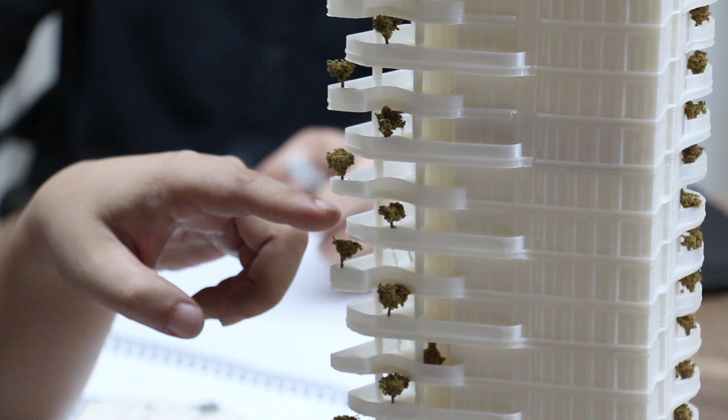WTA Live is this platform where we want to share with everyone what we do behind the scenes in our studio, how we try to develop ideas and try to change the way the city is. Today we're talking about some very interesting projects that we feel have been able to change the neighborhood where we live in.

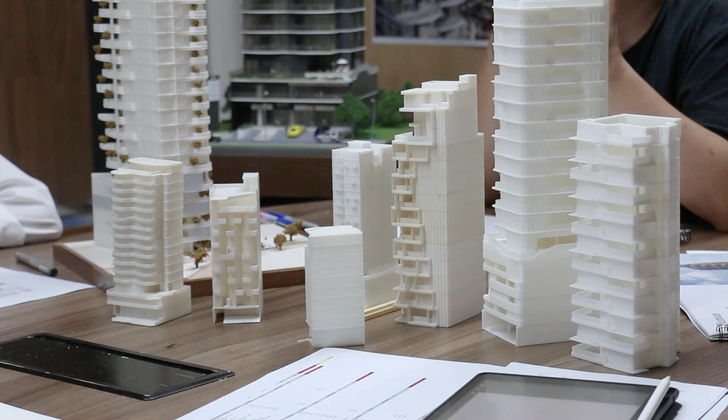The problem with all these townhouse developments is that they tend to be fenced off from the streetscape. And so what you get is a ground plane that's too quiet and sometimes also a bit dangerous because there's not much going on, nobody sees what's happening. In many ways, it's almost like another version of what happened in New Manila.

So we thought to ourselves, how do we expound or change the way the urbanism of San Juan is growing? How can we make this better in a certain way? And how can we rethink how people live? How can we give a better alternative that is also more desirable for the people living in San Juan? How can we come up with a better version, if you may, of what a townhouse is?

Looking at the overall picture, at the macro data, you're seeing how San Juan itself is a very desirable neighborhood, a very desirable city, being the geographical center of Metro Manila. And you start to think, if people here are living in these townhouses, what other typology can we offer? How do we densify? If more and more people want to come and live in San Juan and move in, what happens? What's the next step?

So we started to figure out how we can actually increase density by creating these medium-rise structures. With this typology, which we've been exploring with various iterations, we've been working on various sites. I think we're now on our fifth or sixth site. We've come up with different versions of how this works.

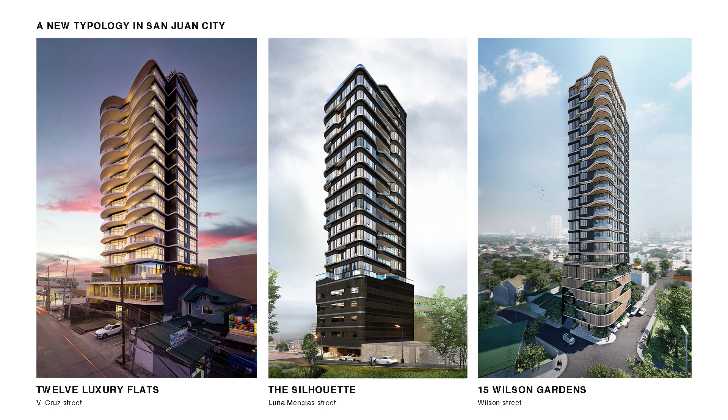And we said maybe a way of making this better is if we can have 300 square meter floor plates and have them one on top of the other. So now what you get is an entire residence on each floor without any neighbors and with better security. Basically you can have it even closer to the commercial areas where you have organic street life happening, where you have a lot of shops. So that's a way for us to densify San Juan and densify the neighborhood.

But I think more importantly, we've also been able to show that with these different versions you can come up with very interesting architecture at this scale. The idea that the Philippines or Metro Manila doesn't have to be just 40-story high-rise towers and then single 2-story villas, but rather you can have a middle ground. You can have a gentler form of density, a milder density that will allow you to say that these units are actually much more desirable than what is typically found in the area.

They offer better security, being in a tower. They offer better privacy because you have no neighbors listening to what you say.

And then you have a better view, a much better view. And of course, you have ventilation, you have the air around you on four sides, basically. So what you get is much more natural light, much better ventilation. And with those basic principles, you already have a much better home, right?

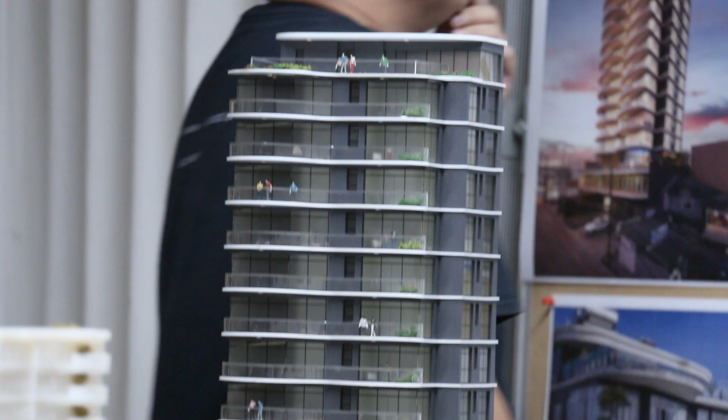So this was the first one really, and this project has 2 commercial floors, 1 amenity, and then 12 units with 1 unit on each floor. This project was started about 6 years ago, and now it's finished. So we have these photos here of the finished building. And it's really one of the most striking buildings that you can find in the neighborhood.

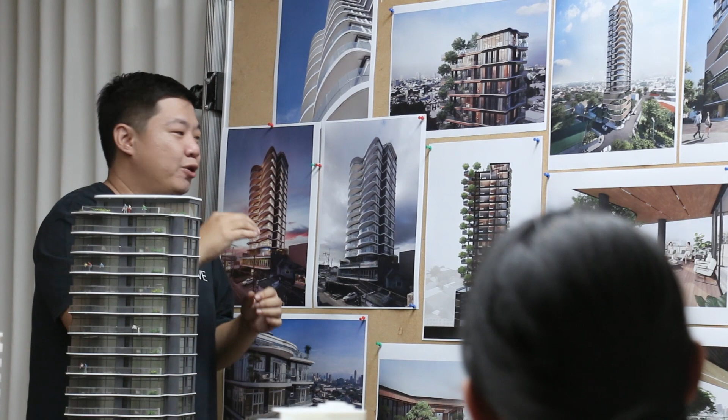And I think the idea is that we wanted to emphasize how you have 1 unit on each floor by emphasizing the slabs of the balcony. So you have these post-tension slabs that are thinly profiled. And so the distinction of how each floor comes out, from the street level even, you can really see the intent of what we wanted to do with the building.

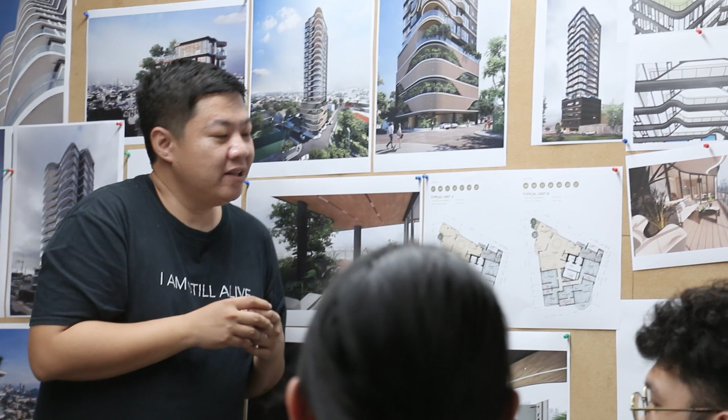The second iteration we did is this building called the Silhouette, and it's actually this building, right? And so the idea here was to come up with a more Manhattanist kind of urbanity and saying, okay, how can we use this 400 square meter plot and come up with something that's very sexy in many ways, right?

And the idea that each floor is actually changing, and so you have a diversity of form throughout the side of the building. So if you look at the sides, the floor plates are changing, it's evolving, it's playing around. And so in this sense, you're getting also the idea that each floor is distinct and that each floor is really a luxury in so many ways, right?

And then a few other projects we're doing of this typology: we actually did this study of a plot in Makati and another plot in San Juan as well. This one is another property, I think in Mariano Marcos or somewhere there. We had a version where you had actually 2 units on each floor. So there's actually 24 units here.

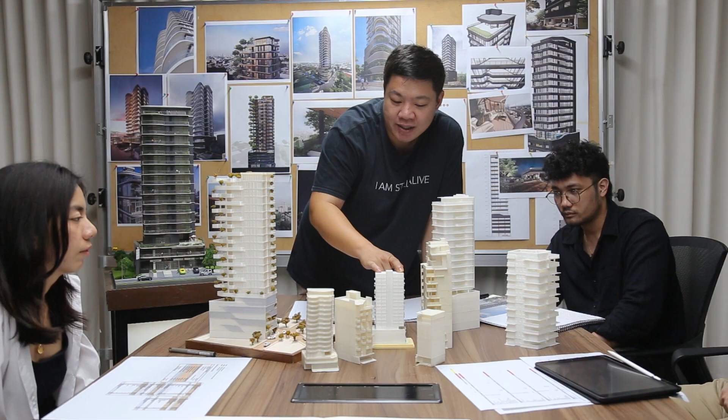We actually did 2 office buildings of the same type. This one's near Eastwood. This one's along Shaw Boulevard. And what you see there is that you have the same type of medium density, where you have a 15-story building. And so, it's a milder form of urbanity that we're trying to develop.

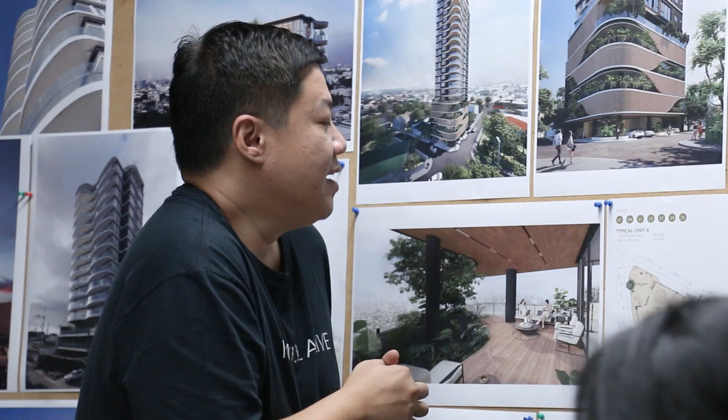Finally, we're now working on this project called 15 Wilson Gardens. And so with this project, we really wanted to improve on what we've been doing and say, how can we make this typology better? And so what we're now trying to say is that if we are living here in San Juan, one of the nicest things is that you see the greenery around you, you see the trees. But if we densify and urbanize more of San Juan, how can we retain more of these trees?

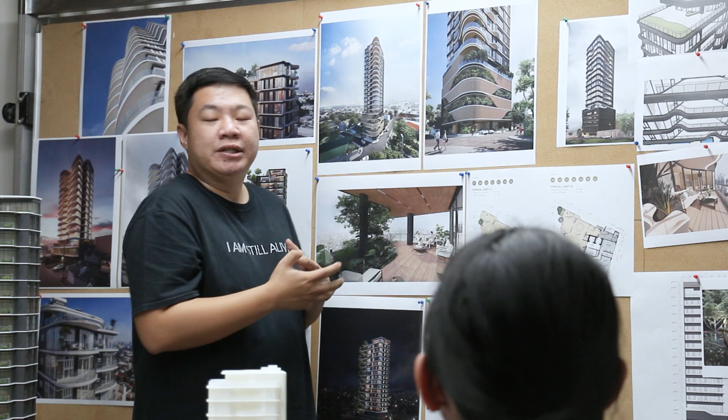And so what we're trying to do is we're trying to build almost like a vertical garden. And so when you see each floor, the floor plate is now a bit bigger. It's now about 360 square meters. And we've made the garden terraces much bigger and wider.

So when we were first starting doing 12, we had about, I think, a 3.5 meter deep balcony. And we said we wanted a balcony that was usable. It was not just a space where you go out, but rather now, what we're doing with 15 Wilson is that the terraces, you can actually plant in them.

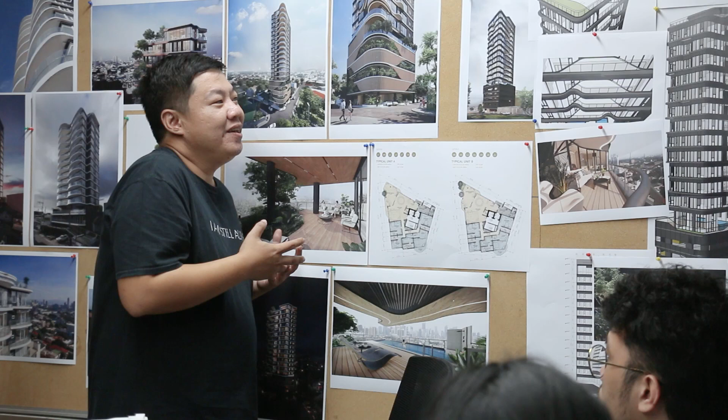So we didn't want it to be a balcony with potted plants, but rather we wanted it to be a real garden where you can plant trees, and then since the floors are kind of alternating, you actually see the canopy of each floor's tree on the next floor.

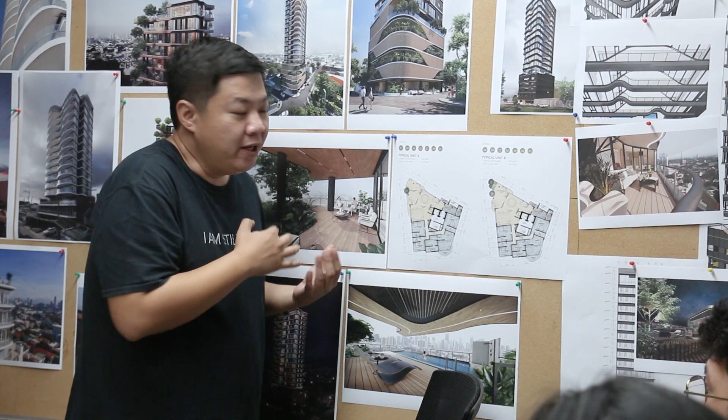And another iteration is that we were able to make the services or the elevators more private, wherein the service elevator opens directly only to the service area. And so the privacy of the living space itself can be preserved by closing it up whenever you're not there.

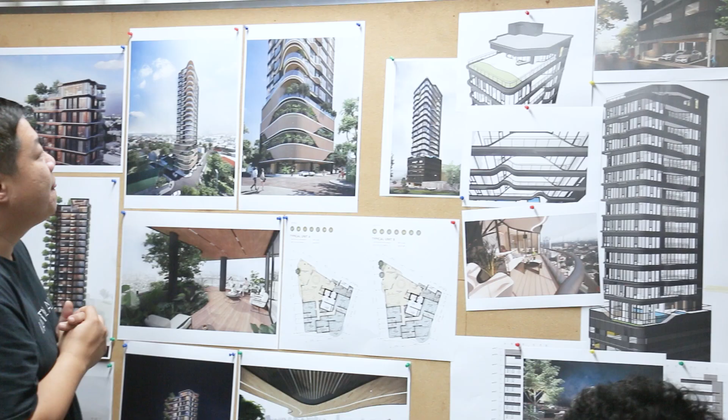And so what we're kind of trying to say here is that we can come up with this almost like highland greenery that San Juan used to be, San Juan, of course, being a hilly area geographically. And with 15 Wilson Gardens, we're saying that this 360 square meter space is just right.

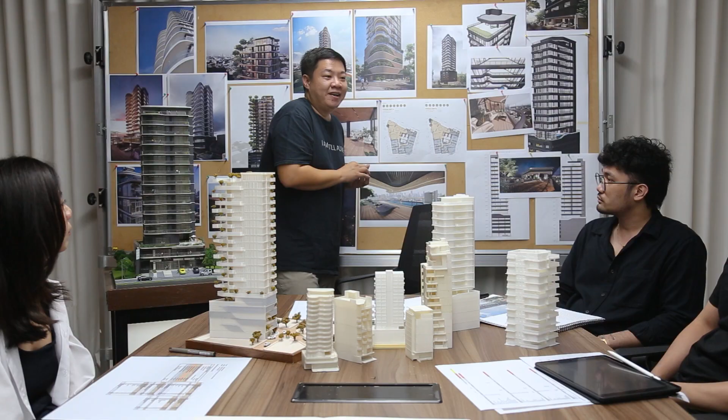Like it's just a bit bigger than what we had with 12. And now what we're looking at, of course, is that with all the spaces, you don't need something more. Whatever more space you would want is there already. So that being said, we're now going to be moving on and working on this next project that is about 670 square meters, and we're going to see what other changes we can have here.

We're back to work on these typologies, and the idea is that we're developing these medium rise typologies. The last project we worked on was a 500 square meter lot, and so for these projects, ideally you're looking at about 400 to 550 square meters. That would be the most efficient size property, but for this next project, we actually have a 670 square meter lot.

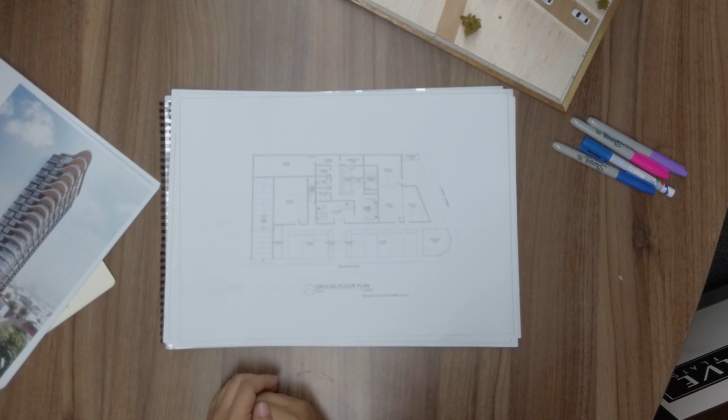And this makes it actually an interesting study, because with a much bigger property, we can maximize the space a bit more and could be a bit more efficient in terms of financial viability even. Because you get much more commercial space on the ground floor, much more engagement on the ground floor, and you're able to make the ground plane come alive quite a bit more.

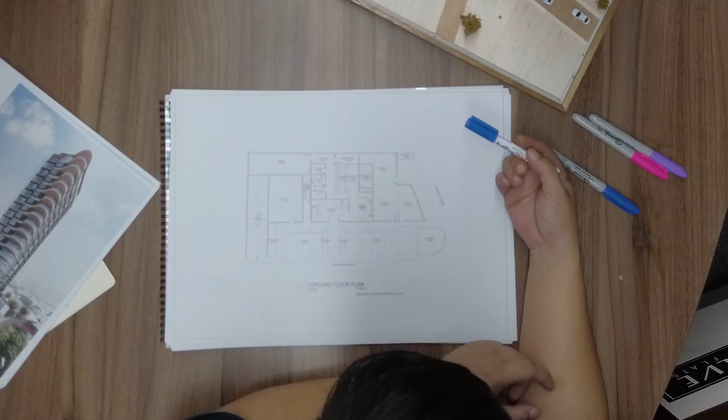And so this is what we have right now. We're looking at the ground floor space. The idea is that you have a small core for the building, and the rest basically is for retail, because you want it to be an activated space. You don't want the building to be just a dead or secluded building, right? And also, of course, you need the space for the ramp to go towards the parking, whether parking is going up or going down.

We've certainly realized that parking going up, or podium parking, allows us to build this much faster and much more efficiently. So recently, we've been able to do that. With this plan, the good thing is that you have the main street having such a wide frontage, right? And then you actually have just a very compact core here in the middle.

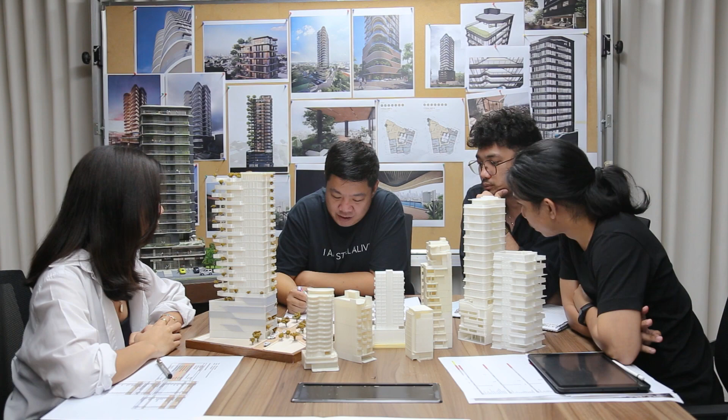So if this is your main street, I'm questioning what this space actually is. What happens here? Why don't we just make this a whole space or something even? Because you don't need much access there, right? Actually, this is a smaller retail space, and this corner is a much bigger retail space, because of course retail wants a corner unit. So you can ask them to take in a much bigger space.

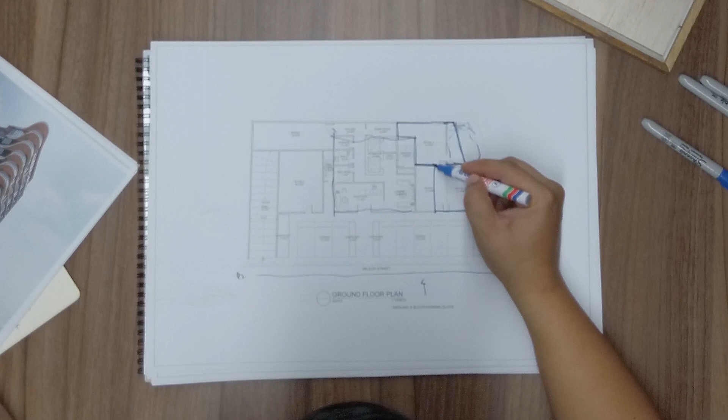Because this is about 100 square meters. And then you can have a small space here for like a water shop or something, right? And then this space here, I would want the retail to continue to take in this whole back, and take in this one. Or this can be a utility area, doesn't matter. But you want the full retail space here, and even this one, right?

So that being said, then they all have parking. I would want this to be parking as well, if I can, because I already have this main landscape here, right? You kind of have this nice front.

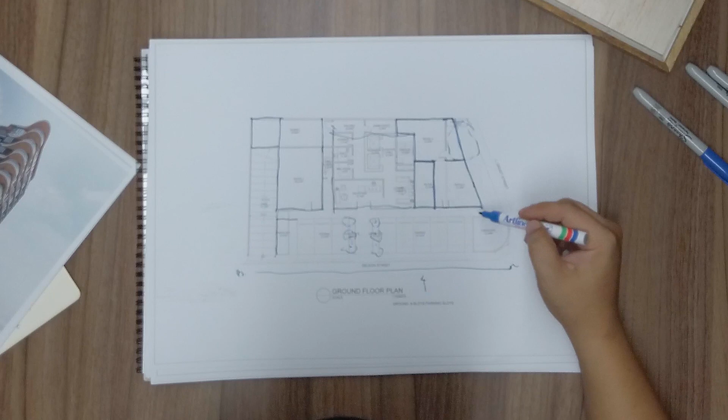And you also have this area. So I don't know if we can actually have indoor parking here. So this entire thing is landscape already, right? I mean, they can have al fresco there or something eventually. That's kind of not an issue. Then this one can be landscape. So that's already 2 strips there. That's fine. I think you're gonna have a small bamboo strip here or something. That's fine. But then you want this to be basically another parking slot.

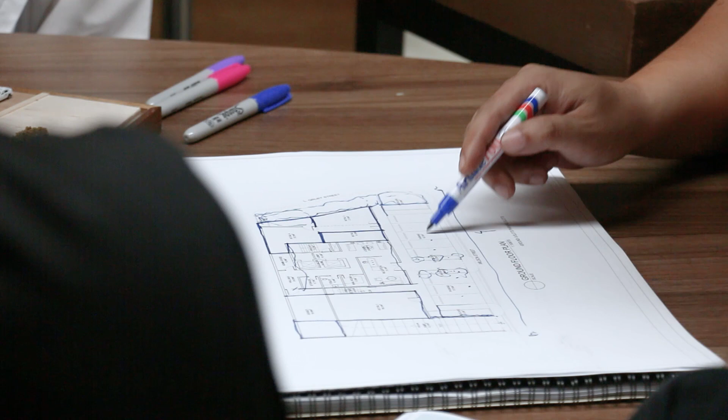So in effect, you have 1, 2, 3, 4, 5, 6, 7, 8, 9, 10 slots, right? So these 10 slots serve 2 stores. So maybe you have like 4 each, and then 2 can be for visitors. So maybe these 2 can be reserved for the visitors. And then all these is parking for the retail.

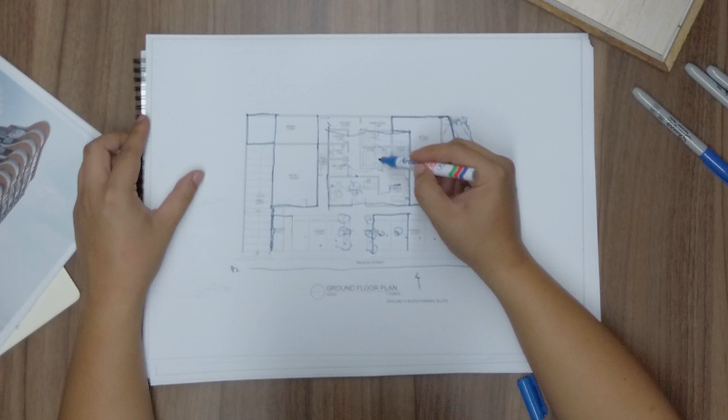So when you go in, you have a reception. You have a waiting area. You have a lounge. Main room. Maybe this one has to have a door or something, so that these guys can access the main room. Right, go to the lobby. Go here. Toilet.

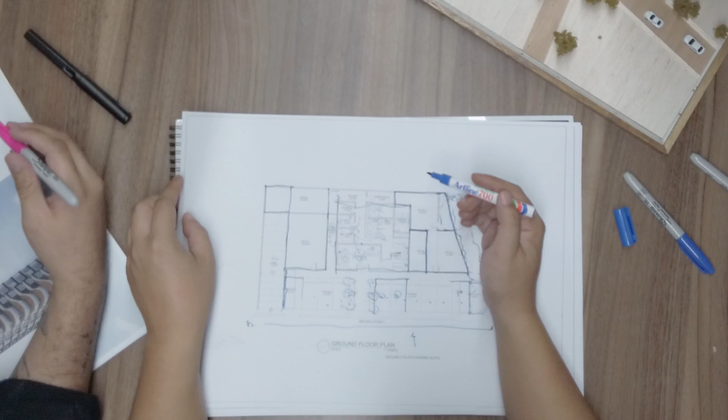So after that short musical interlude, we're still talking about this new project. We don't have a name for it yet, but the idea is that now we have a 670 square meter lot, and how do we maximize this? Definitely we get better parking ratios, and simply the cut of this lot is pretty nice actually. So we're here with the small core. It's very compact, so it's nice. It works well. In all essence, you get about 200 square meters of retail, which is very good already. That pays for the difference in the lot size already.

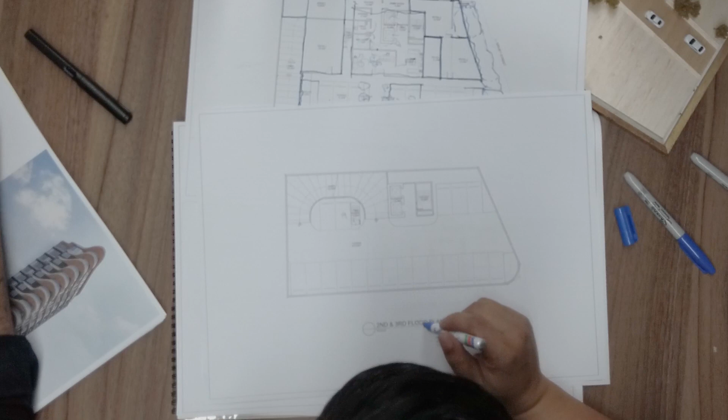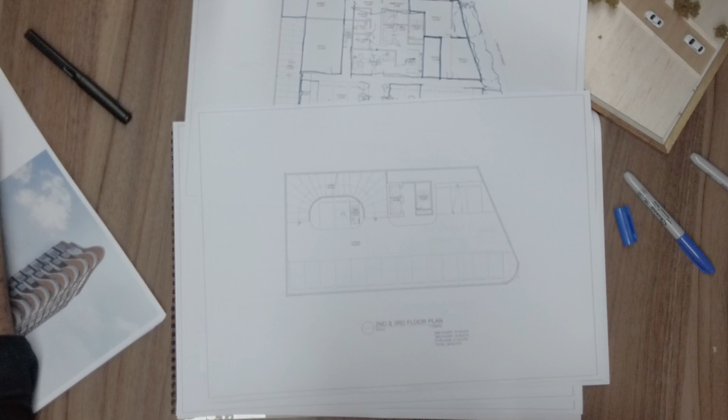So when you look up, your parking floor. So we have a parking floor here. Okay, so I wanted a second floor commercial. So that's the one missing. I want the second floor to be commercial, and then parking to be 3rd, 4th, 5th. Okay. So that being said, if this were commercial, this would just go up, right? And just end up exiting here. Down. And then you'll just flip it down on the upper floor or something like that. Or you don't want to make it go down here.

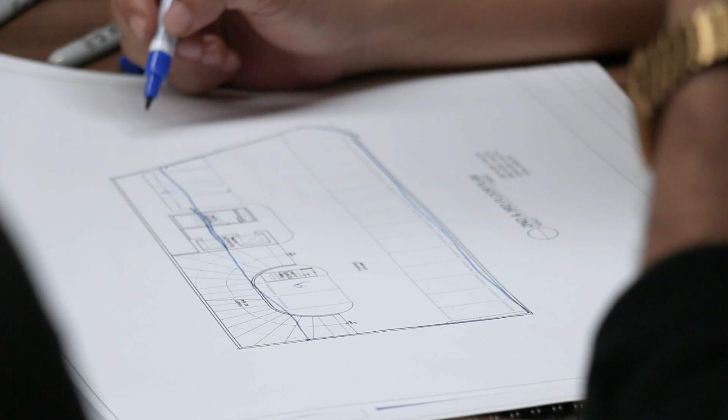Because you need it longer, ne? Yeah, you're gonna need it longer. The core has to move a bit down so you can have your parking here. Right, so probably exit here. So then I get an entire commercial space here of this size, which is pretty substantial. So I end up getting about 500 square meters of commercial space, which is pretty good. And so now when you get to the 3rd floor parking, you're actually coming out here.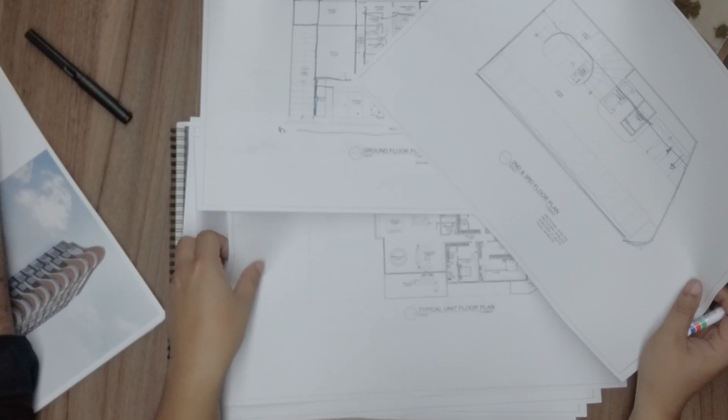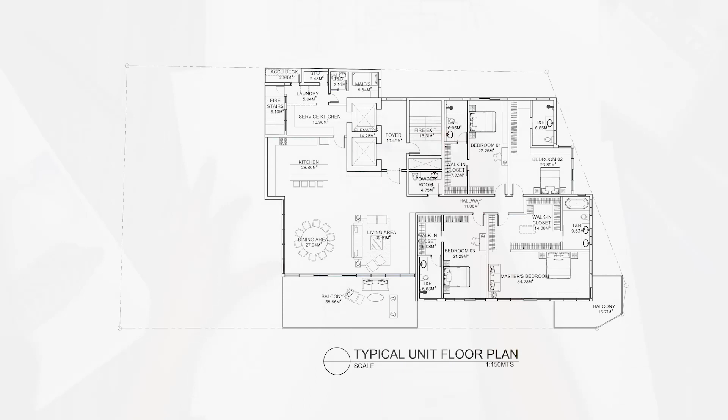And so you want what? Do we want to move the core? So that's what you have to see with the typical floor. Because actually the typical floor you can move anywhere naman. No, we want it to stay here. So can we move this core? Or do we just make the parking go here na lang? And then you waste all this space. So you need this space. So kailangan mo bumaba ito. Right? Which means you end up here. Actually, okay lang. So wala naman laman tayo. Doesn't hurt if you move it here.

Can add balconies. No. Your service core would move definitely to the left. Getting that space down. This chunk. Since that moved down, won't we move this left? Yeah. So your exit will be here. I don't know if that's visible. Or the elevator. Because you need your L-type elevator to be here. So you're gonna have a challenge with this elevator, how we lay it out.

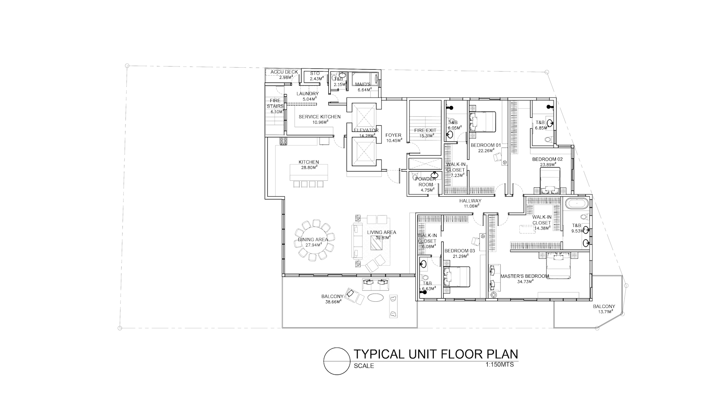One way is that you actually lay it out like this. And you still have a wall here if you want, and then this is actually your main door or something. That's okay. Because this is gonna be your main door. It's gonna be your living, whatever. Just switch it around. Right? Or this can be here also. Or the stairs are here, elevators are here, so your main door is here. So it opens to the living.

Pwede. So this is your service core. Just a bit bigger lang. And then this one, well, you get a smaller unit. Oh, and then you can move your toilet here. Why do you have a walk-in closet for the bedroom? Because the rooms are too big. So this becomes a junior suite. Junior.

Well, I would want my master's bedroom to be bigger if I had the option. Right, if I had the... Well, this is too small. The balcony? The balcony is small. I would probably want to eat up more of this. I would probably want the balcony to extend a bit more. I can just extend this, I think. I'll get about 50 square meters for the balcony.

And then the living area can go all the way here. I mean, so it's clean and all that. So that means you end up eating up to here. So this becomes part of the master's. Right. And then this is the other bedroom now. So what do you think? You kind of end up with this space here. And this is the other bedroom.

Right. And then this is the other bedroom. This one, definitely your toilet and whatever closet space. The bedroom can be smaller. The bedroom can be like this. This is the master suite. Well, this one can be bigger also. So I don't need this one. I can actually put it here.

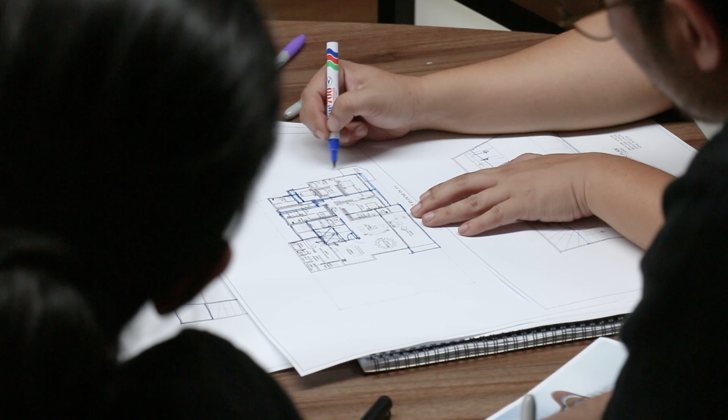Kasi this is the front. You basically don't really need this balcony anyway. I don't even think it should be arranged this way. Baka dito siya. This might be a better area for the balcony actually. Something like that. Kasi the L-shaped balcony is not very useful. I think that's a better form, right?

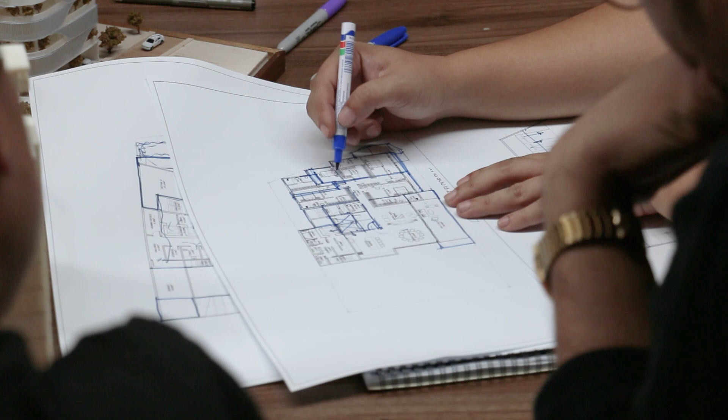And this can be your toilets and walk-ins, whatever. This can be a walk-in. And this is the bedroom. This is an anteroom, right? Like an anteroom, and the bedroom itself is here. It's kind of nice. Kitchen, living, fine. Yeah, living becomes bigger. You can have like a whatever.

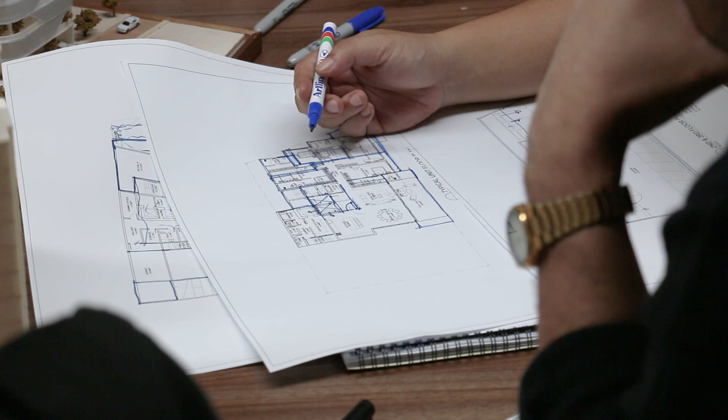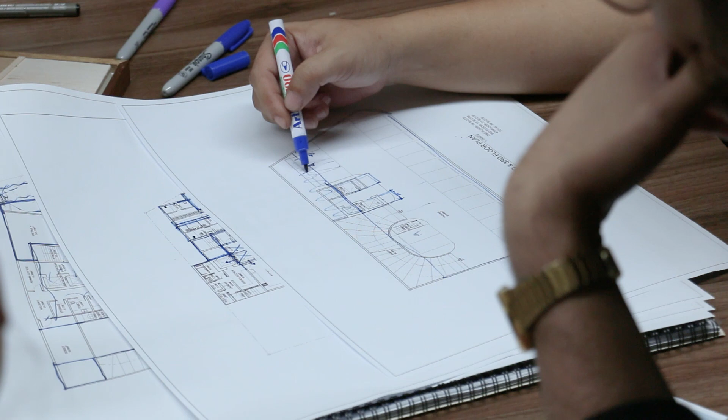Pwede, no? So kunin natin to for the bedroom. So we can do this, we can make this go down. Okay pa rin naman eh. This is pretty wide, it's okay. So you can have your ramp here. That's okay. Works for me. Question is, what do we do with this? You have such a big area here.

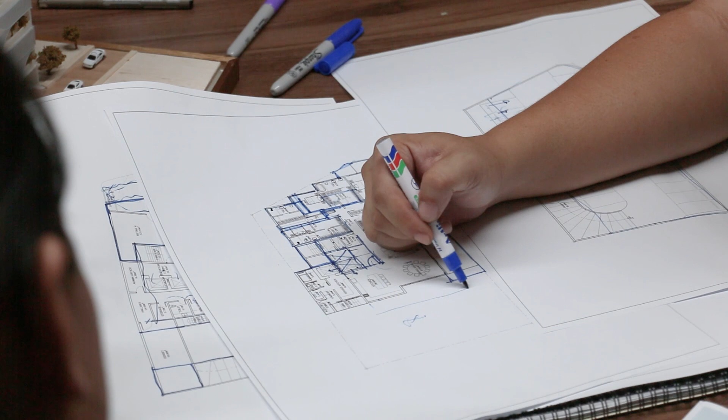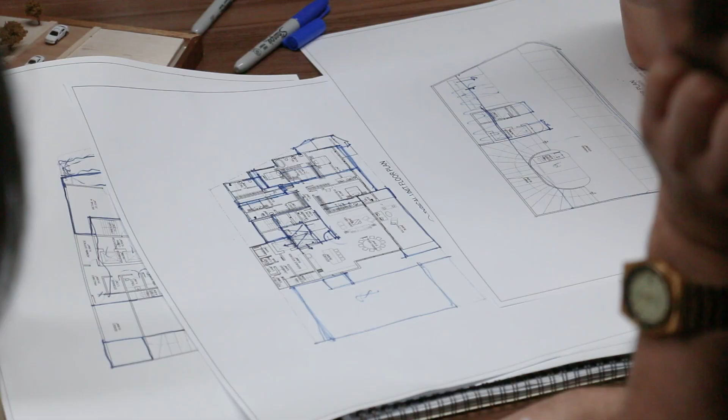If ever I want to build an attached building here, do I just set up here? Let's say, okay, this one can be far away if I want. Just go here. Or not? This can be the second phase. What will be the typology of this project? It can be a home office. So if you buy here, you can actually have your office here. That's kind of cool.

Diba? You already have a kitchen. Parang okay, I have my small clinic here, and then maybe you can even have a connection here or something. If you really want, you can connect this balcony also. But I think this connection element has to be optional. Maybe not here, so at least the balcony is always outside. Right, so this is kind of optional. If I buy this, I can connect. If I don't buy, then I don't.

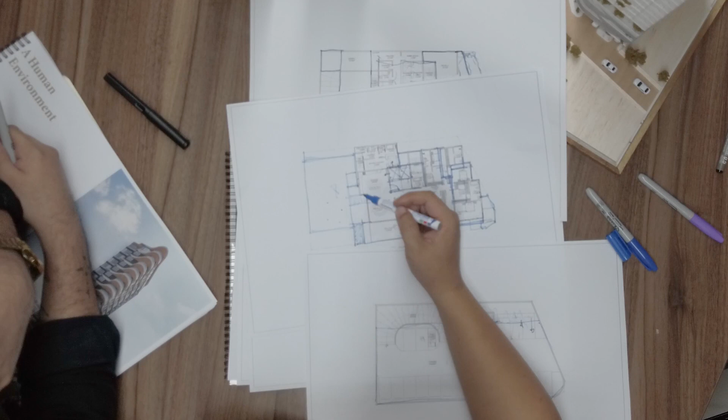Right. So then every floor can be owned by the same owner. And then if you say, okay, my house is too small, I'm gonna buy this to just make it my bodega or extend my house, right? So this makes sense to build eventually. I mean, it's possible, right? And then this is the view. This is still the main view, so your view is still this one. That's still okay. This is Wilson. That's still the main view.

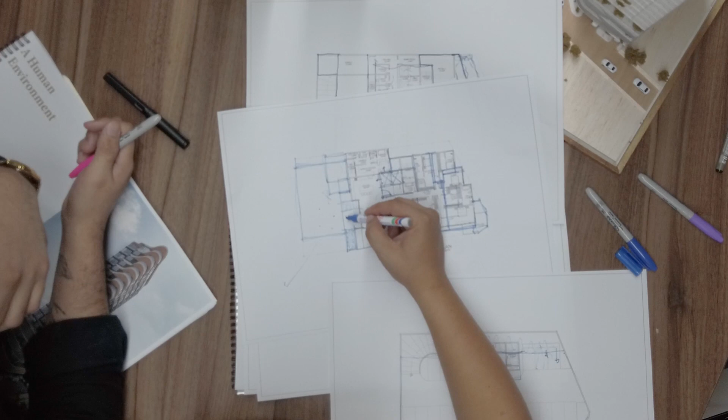Oh, this one is your core anyway, so this one you can actually enclose naman natin. Your core will probably be here, at most up to here. This is your core for this. So you still have a pretty nice solid building. You have windows on this side, windows here. You can do a firewall here if you want. If you don't want it, you can set it back a bit here, so you have a window here, firewall up there. We have a pretty nice space. This is a good 150 square meters. Small office. Clinic, something.

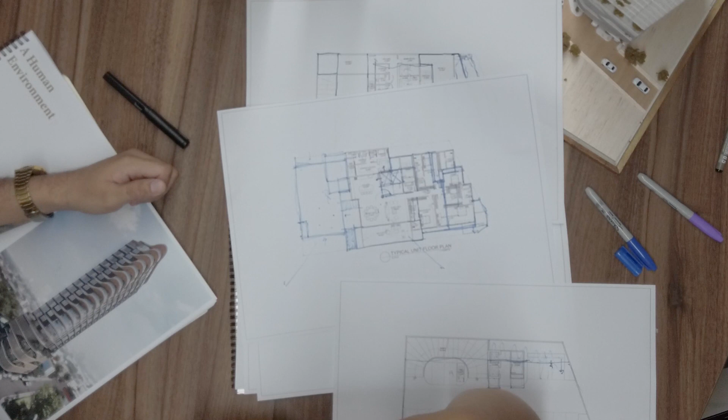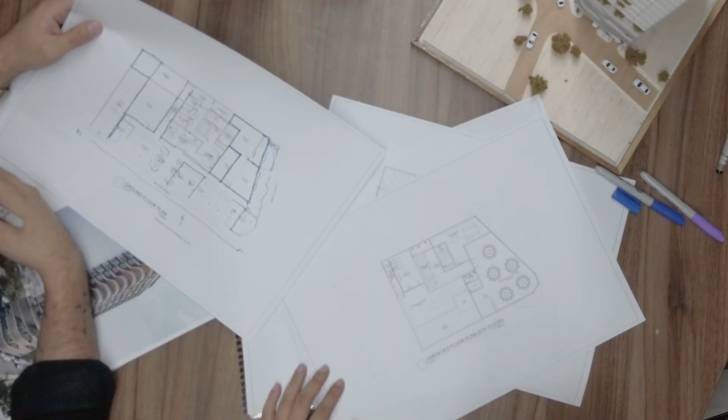And then, for the amenities, same. For the amenities, you basically will get the same thing. You can actually mix your amenities with some more leasable retail type of thing. Para more exclusive, like this can be like an exclusive club or something in this area. Right, that can be something like that.

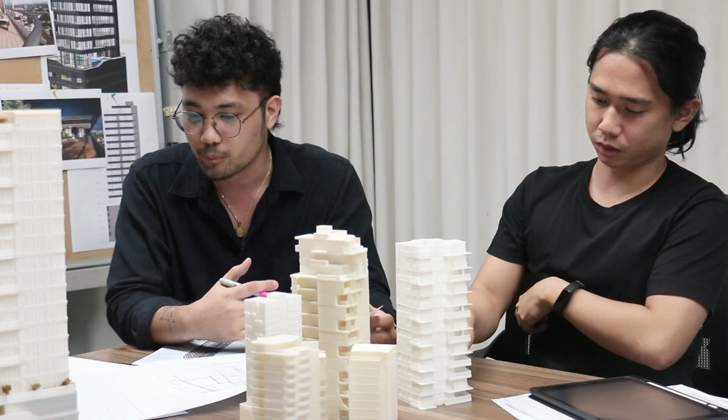Just to take some thoughts from what you've said earlier, since we've been talking a lot about social architecture even before, how can we engage the podium design in terms of the existing environment, since nowadays podiums were just designed as podiums? Like here, we're just designing it. Okay, this is the ground floor. We're providing parkings for it. But podiums nowadays are neglected. And if there is something that we can learn from the pandemic, it is that we don't have a lot of shared spaces like the amenities.

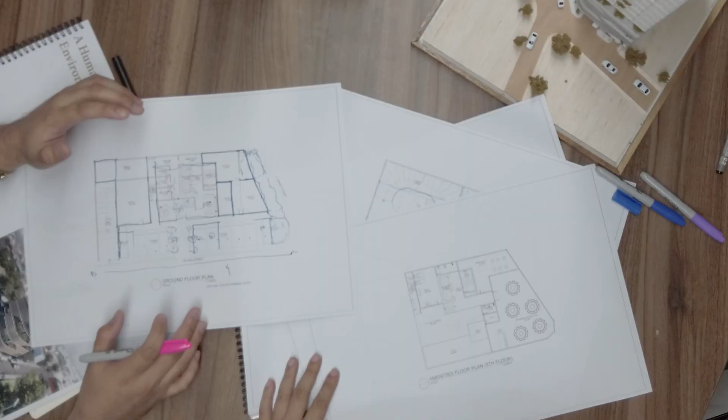When we're talking about the podium, maybe we can use it to engage more in terms of the people using the whole structure. Also, in this kind of environment, since it's a corner lot, maybe we can do something about this area here without sacrificing too much of the leasable spaces. Because if we're engaging it to the major streets, and since it's a corner lot, maybe we can do something about creating a vertical open part. It's just a visual aesthetic, but it gives something back to the community. It's not just for the users. It's inside out. It's a double-edged sword.

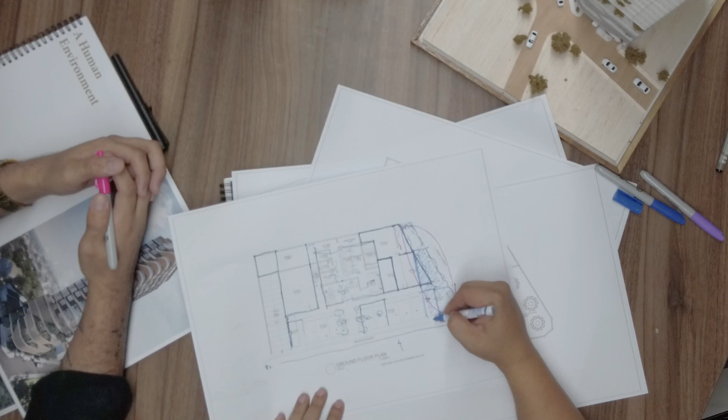Well, I think we can cut it here. We can give this space so you end up with this wide space here. Right? Because we don't really need this corner. It's a useless corner. So if we're able to cut it here maybe, then we can give this like a 4-meter wide space already, right? So you can give this parking slot if you want. And then we can make this corner park here, small park. I don't know, we can put a small library here. Right? Small reading area, if we want to, we can make this a playground, this back area.

But one of the things that we're really looking for is more engagement with the street level. Yes. But engagement with the street level also means that you need these spaces to be activated. Yeah. Right? The building's not gonna run that space because that's a private building. Those are residences. Residential. They're not gonna. So you need tenants to actually activate your ground plane. Without the tenants, it's dead, right? So that's why you need commercial space. So I think that's why you want there.

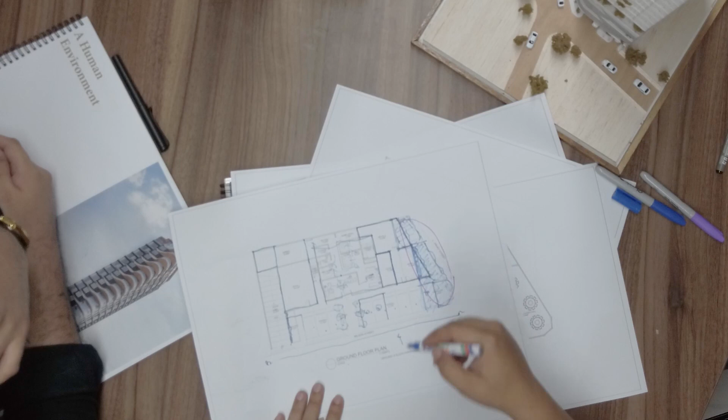But definitely you can make this interesting, like a wooden deck even or something. This area here. Yeah. I think the length allows us to do that now. The office space. And then because of this cut here that's diagonal anyway, we might as well just give it to them. Right there. In this area. Could work. It's wide enough actually. Yeah, this is like 150 square meters already. Could be.

But I think the question really is what to do with the parking, right? I mean, it's always parking on the podium level, so I think that's why we have to make parkings more open, more porous. It's like how we're doing it here. Parang if we can make parking spaces that are more open, then they become more adaptive. And hopefully if the day comes where we don't need parking anymore, then this can actually be another space. Like, that's what we said about this. If I don't need one floor, I can just turn that floor into an office space, right? So I don't mind building 4 floors of parking, because at the end of the day, that parking area is an open area.

Actually, one of my thoughts is like, what if we do an open gym? Open gym. Yeah. Some buildings could actually do that now. They moved their gym equipment outside. They moved it to the ground floor in front of the lobby, so it's open air. Mm-hmm. So rather than keeping it in the normal amenity floor, they moved it down.

Actually, it's more of not really an open gym. It is an open gym, but I was thinking more of like a vertical park. Mm-hmm. So the thing about park space is that we think about park space as somewhere you walk, you go around, lakad. But you can actually have recreational equipment. Diba?

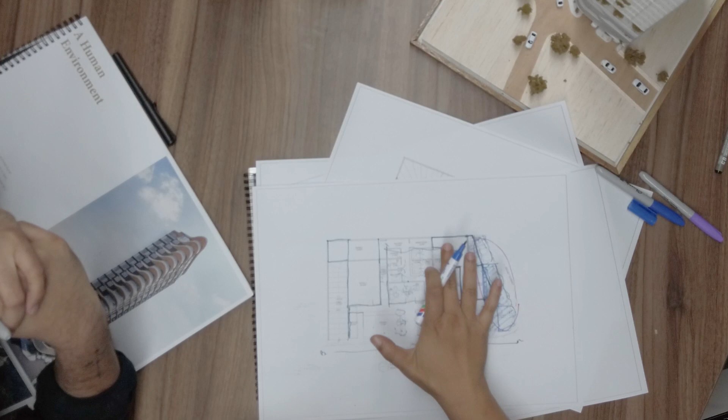Maybe you can provide that to the public, so it becomes a public park in a way, or it can be a club—a transition space. It can be like something where you have members in the area, and they have access to this park and pay a fee, which then maintains it and sustains it better.

I mean, it's exclusive but merged into the building, so then it's also an asset of the building because now you have a park in your building. At the end of the day, it's still a park. So that's something interesting—maybe that can be worked out.

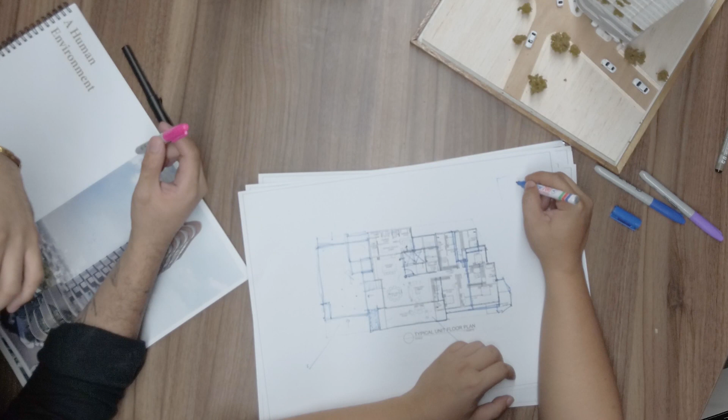Also, on the typical floors, is it possible to normalize having bigger balconies? Because nowadays balconies are designed as utility space, service space. Yeah, I think that's the problem with balconies. Most owners try to imagine, okay, let's do the minimum balcony—like 1.5 meters or 1.2 meters. It's just for the aircon.

But it becomes useless because what do you do with this? You come out here to smoke, right? You hang laundry, put an air conditioner here—so this is actually wasted space. But when you turn this into, let's say, you double it into a 3-meter space, now it becomes useful.

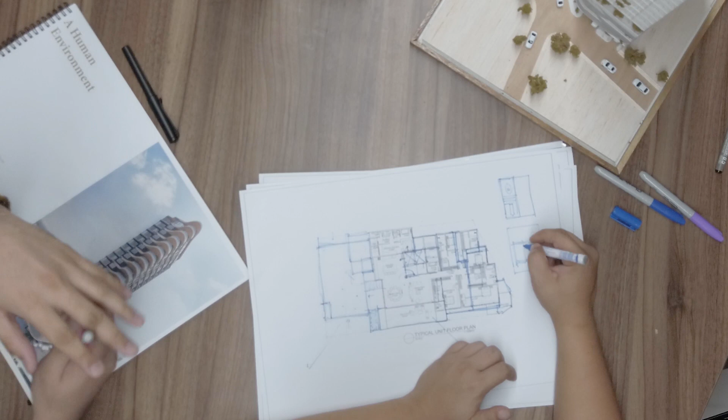Because what can you do with a 3-meter space? You can have an outdoor sofa, it becomes a terrace garden. You can have a small tea table. So now it's a space you actually use even more than your living room—it becomes a lanai in the sky. So I think we need to define how big this minimum space should be—whether it's 3 meters, 2.4, 3.5, or 4 meters—we need to do a proper study on this.

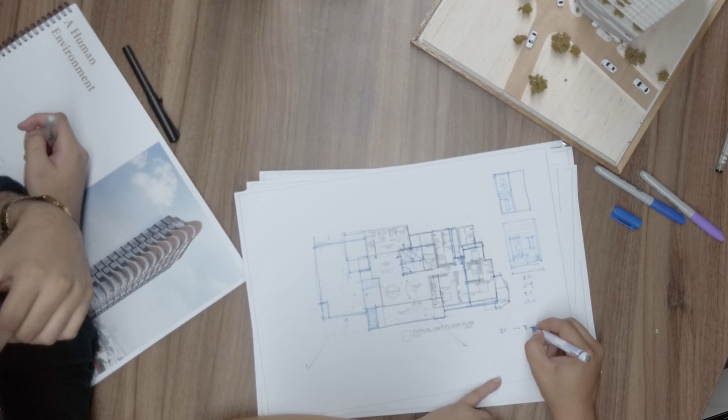What is the added benefit, right? So let's say you go from 3.5 meters to, for example, what we said we wanted with Wilson was we wanted it to be 8 meters, right? So we wanted to be around 8 meters. So what's the benefit? Let's say for 3.5 meters, I can have an outdoor tea table.

So what do I get here? Do I say I now get an outdoor dining area? Probably, so that's something. Or do I say, if I have kids, is it now an outdoor playground? I have a playground in my own house, that's fine, right? So we have to define that.

I think we can come up with a document on that and actually say, with this space, 1.5 meters, you're only making laundry space, yosi space, or even an air conditioning space, right? But now with 3.5 meters, you can have like a small tambayan, it's a lanai. With 5 meters, what can you do? Is it now a garden, a terrace garden?

With 8 meters, what is it? It's now a dining room, right? It's an outdoor dining area, al fresco dining. So we can actually, or is it even your own private gym? I think we can actually do that. That can be an interesting study where we can actually share that with everyone.

Maybe in one of the episodes, we can actually look at how we continue with that, maximize the typology, balconies, and see what the changes in these outdoor spaces are. How does it change from a balcony to a terrace to a garden?

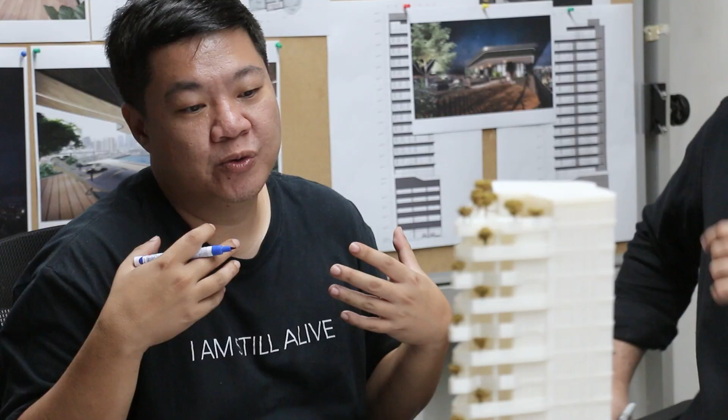That's why I was very particular. With Wilson Gardens, we said I wanted garden terraces. I was particular that I can actually plant in that terrace, right? So it's no longer just an open deck. I can actually have a fish pond there if I wanted to, because if you can plant, you can have a fish pond, the same weight. You're computing the weight of water, so I can actually have a fish pond there in my deck. So those are the opportunities you're looking for, and then I think we can do a diagram on that, maybe.

Isn't that similar to metabolist architecture? Maybe during the pre-selling, they have their options, like if you want your unit to have a bigger balcony, this will be the look of it. Well, metabolism is about being able to kind of expand, like it expands modularly, right? But this one, it's not about expanding.

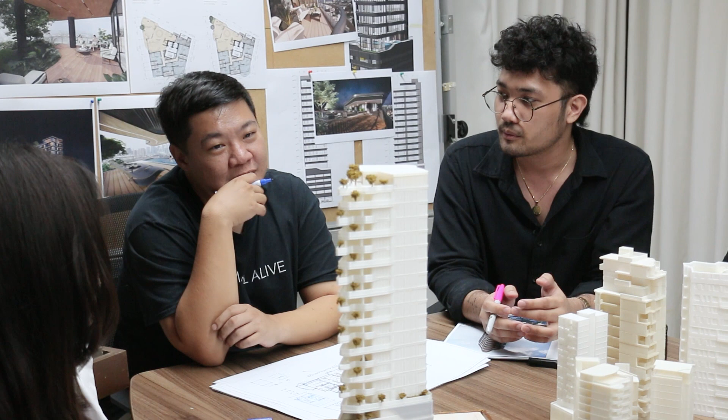I think it's more like a side study to this project where you're actually studying what the balcony is, right? You're saying that you can have, what are the available outdoor spaces or available outdoor vertical spaces? I think we have to define that. Also, like it can be north facing or south facing. What's the sunlight that you're gonna get? What's the quality of air?

At what floor does it become? I think it can be a whole exploration of vertical open spaces, because even the office, I was thinking of doing it. But what if we do something even more radical? Like I remember we were talking about it in Silhouette, what if we remove the wall altogether and it just becomes one big open space?

Yeah, that's an option, but I think that is an option for the user to do. For example, this one, you can just say this is just a colonnade, a plantation window, right, and everything is open.

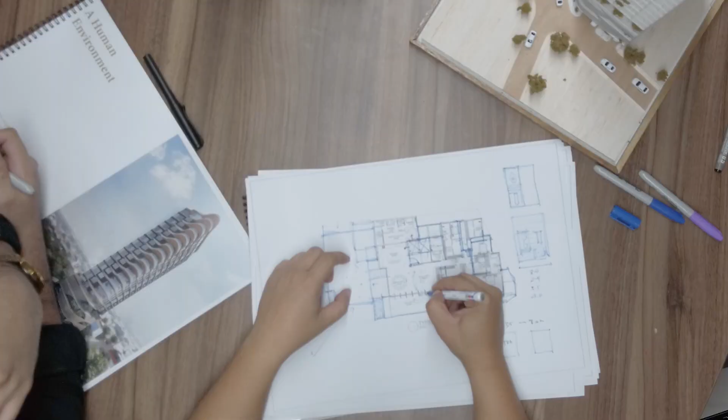That's certainly doable. I mean, even with Wilson Gardens, we can do that for the entire unit, because it doesn't affect your facade anyway. It's so deep, but the terrace is so big that it doesn't matter if you change that element. So, but that's for the user to change, and I think we can do an option for Wilson Gardens with that. We can do like an outdoor deck option. What's the floor plan for this?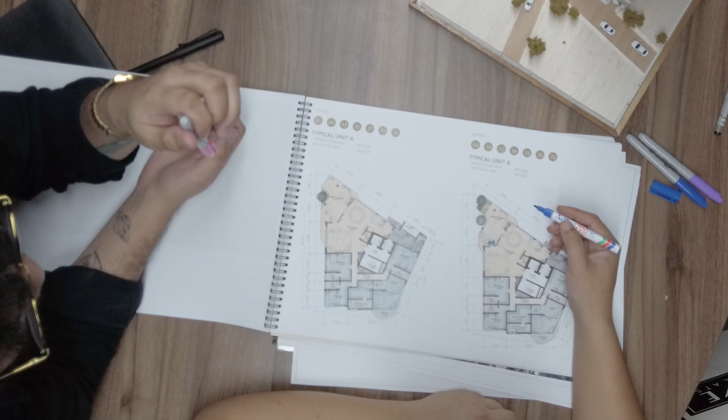But I really like the location of this because it's facing southwest, it blocks the sun. It's almost 6 meters deep, 5 to 6 meters. It can do a lot, it becomes its own eave. And the continuous trees, it's alternating.

Yeah, I think that's really what makes this project unique. It's actually what we have outside the office, right? Where you can actually see, if you look here, the idea is that you're living on this floor and you're seeing the canopies of the floor below you.

So the trees are supposed to go up here. This doesn't show it, but the trees are supposed to go up here, so every floor will see the canopy of the floor below it. So this floor sees the canopy of this tree.

Yeah, you have to change these ones, that's what you do. I don't think Joe got it. I think we want our canopies up to here, so someone standing here is actually enjoying this canopy.

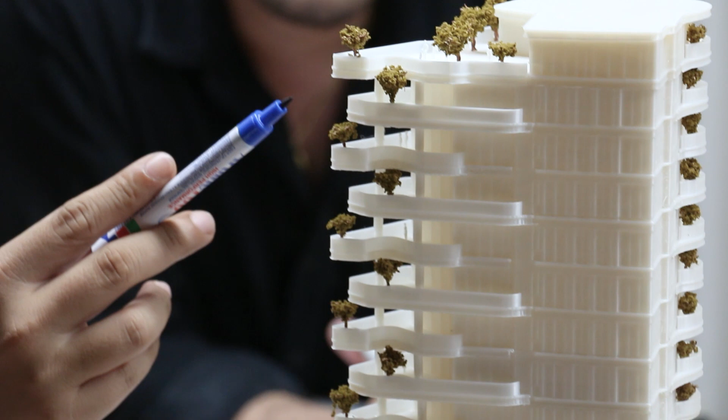The plant of other people, yeah, for me it's kind of a way of communication. Yeah, it's shared, it says you're a community, without compromising your space. It's just like you're saying that you're sharing the natural element, right? So it becomes like a small community, and it kind of motivates you to have a better tree.

Because as Filipinos, your neighbors will fix it, planting those trees before they even come in. They have the option of changing it definitely, but I think the idea is that we'll plant it before they come in, so that it's already there.

And I think another thing that would be nice is, since us three sit beside the window, it's always nice looking at birds and wildlife that goes through it. And then imagine having a bird perch on top of your neighbor's tree, and it's actually on your sight line, because it's the top of the canopy, and you're literally having breakfast.

I was able to get 2 parrots exactly like through your balcony. So through my balcony. I mean, I think that experientially, that's part of your hobby. Well, you can actually keep birds there and let them just kind of grow.

But yeah, so I think it should be interesting once we finalize that balcony space here in Wilson Gardens, so we can do this kind of thing. I think we should do this study of what an outdoor vertical space means and what are the different iterations that we can come up with.

In terms of range, it can go from 3 meters to 20. I mean, for example, if it's in the podium, it's a deck or a roof deck, what can we do with a 300 square meter space, versus a 10 or a 20 or a 50? You can just do 10, 20, 50, whatever. Well, you start with 5, with the typical 1.5 by 3 meter balcony, right? Work on that.